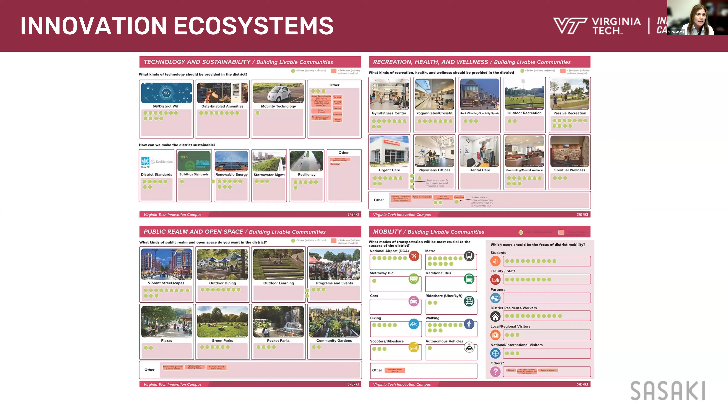So while we were evaluating sites, and we'd partnered with Alexandria's Economic Development Partnership as well as the city, an opportunity came up. The North Potomac Yard developers saw Virginia Tech as a catalyst for launching development of their phase one. Rob's going to cover that in a lot more detail in his section. But essentially, phase one of North Potomac Yard, if you're looking at the top left, from blocks 4 through 20, is approximately phase one.

North is to the left here. As you can see in the lower left, with the photograph there of the prior site in an aerial view, there was a theater on that phase one site in a sea of parking, essentially, with retention ponds at either end. And phase two of that development is where you see the current strip mall site.

But we saw this as the golden opportunity that we really needed. It aligned with all of our visioning, and the small area plan already featured a new metro station at the south edge. There was a linear park, a long-term mix of retail, residential, and office, and really great connectivity, including the metro, but otherwise as well. It really supported long-term growth potential there too, with phase two opening up a whole other area of development. So it checked all the boxes for the seeds that we needed to grow a successful innovation campus within a successful innovation district.

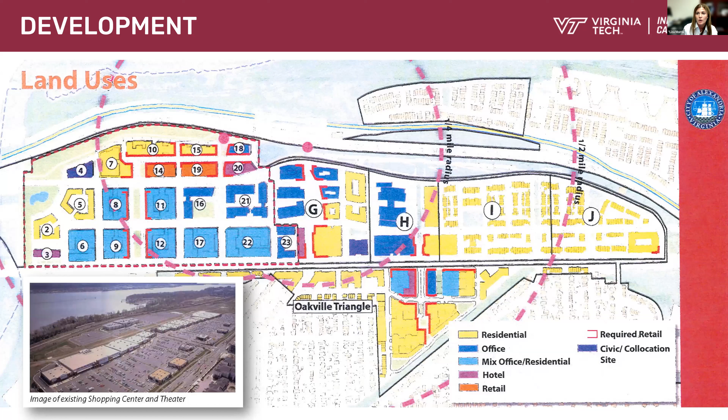For example, the pandemic happened right in the middle of this. And then the small area plan presented some challenges to us as well, where we ideally wanted to locate our campus at the north end of that phase one. In the small area plan, there was an above-grade parking garage there, and it was the only one currently allowed in all of the North Potomac Yard small area plan. So that had value from a development perspective.

But this would have been a wall between us and the rest of the district. North of that site, block 4, was designated essentially a K-12 school site. And while that relationship was really important to us as an innovation continuum, we knew that we needed to aggregate that site in order to create the complete campus my leadership was looking for from an end-state perspective. So there was some challenge there.

Another challenge was the zoning envelope itself, which included FAA height restrictions, National Park Service setbacks, and some related height limits, as well as the rest of the zoning envelope. But as it turns out—and this is a lemons-to-lemonade story—this challenging zoning envelope actually partly drove the innovative process and design outcomes for the building envelope developed by Smith Group. We're really excited with the results, and Sven will share more about that story with you a little bit later.

So we developed multiple urban framework scenarios within what we had to work with there. This directly informed our negotiations and back-and-forth with the development partners. Virginia Tech, we were really looking to the future—we had a long-term vision of wanting to create a campus there that would be there for hundreds of years, is the way that we were looking at it.

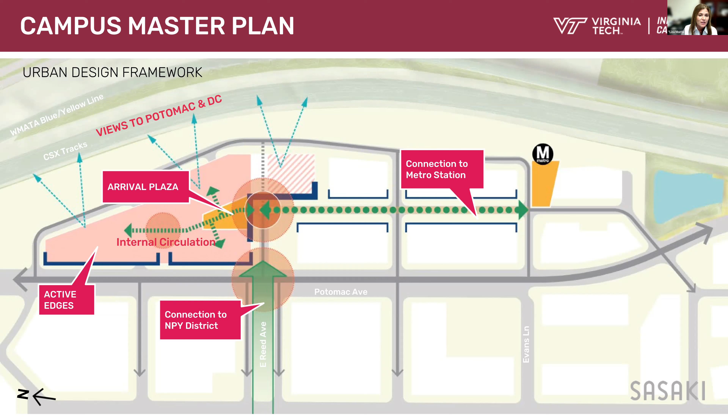So we developed win-win strategies and synergies throughout the negotiation process with some solutions that we felt were significant improvements for us and created win-wins overall.

We slightly modified the plan at Reed Avenue from a dog leg through the site to a pivot, which gave us a little bit more site development potential.

And working through the whole process of what it would take to move the approved above grade parking to below grade parking - that put some stressors on the institution in other ways, but it was really important to the site, and we were able to work that out.

That allowed us to open up the site and be able to receive into the campus rather than having the parking garage there and a wall at that really important edge.

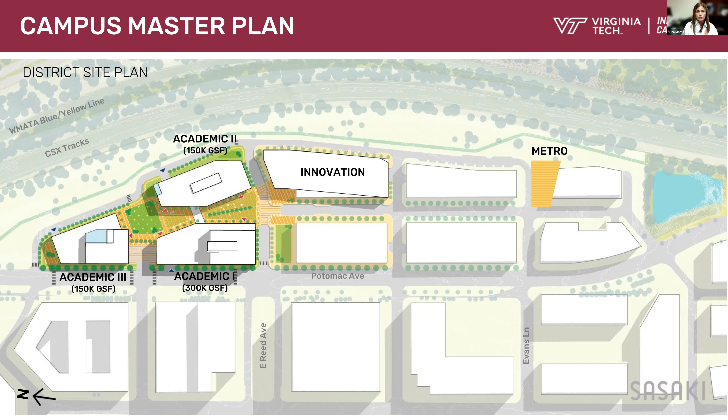The K-12 site on the north end, while it's important from a relationship and that innovation continuum perspective, was moved into phase 2 of the development. And that allowed us to drop that through street and really aggregate those blocks together to create a feasible campus site.

So here we're zooming in, and we carved out open space from that overall development potential envelope, dividing that into 3 separate buildings.

And here you can see we have academic building 1, which is the building that's currently under construction, and that'll be their biggest building on the site. And by doing it this way, it also allowed us to phase in academic 2 and 3 over time.

As our campus grows, another key move here to support innovation and the district overall was creating within that urban framework the raised plaza there, that raised pedestrian crossing from campus to the rest of the development.

And then specifically tying to development potential, we were able to work with the developers on off-campus within a building, to be able to lease some space there to support partnerships and innovation space that would further foster partnerships and spin-offs from the institution and within our academic building 1 space.

And so we were looking to that type of space to also create incubators and accelerators.

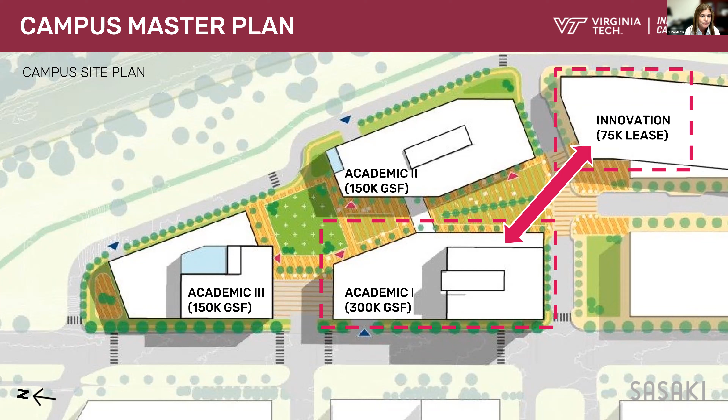So the shapes of the zoning envelopes were very intentional and specific. In part, we wanted to create surprise and delight as you moved through our campus, but there were also some key things that we did that tied back to the dramatic landscape experience you have here and at our Blacksburg main campus.

And so we wanted to highlight this fantastic urban context, but also tie back to Virginia Tech and our brand. For example, the campus is organized around a green space, very similar to the way the main campus is organized around the drill field, our large signature open space.

But within this tight urban context, everything is doing double or triple duty. So for example, the green space here also hosts a 30,000 gallon cistern underground, which is just one of our many sustainability components of the campus and site.

We also really worked hard to adjust grading across this site to ensure that it was fully accessible. So we wanted a site without any stairs and slopes less than 5%, without any ramps either, because we really wanted to ensure this was a welcoming place for all.

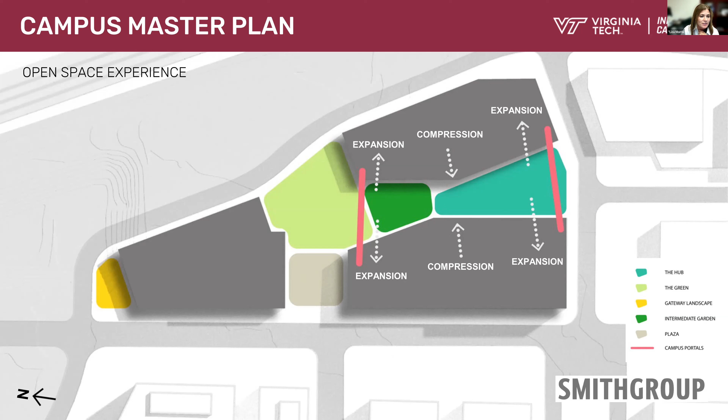One element that was really important to us was to ensure opportunities to have science on display. And so during this process, it worked really well with also the city's goals to activate the street level within the district, while giving us the opportunity to leverage that science on display as our brand of retail, if you will. And then you'll see that play out as you see more on the design that Sven will share with you.

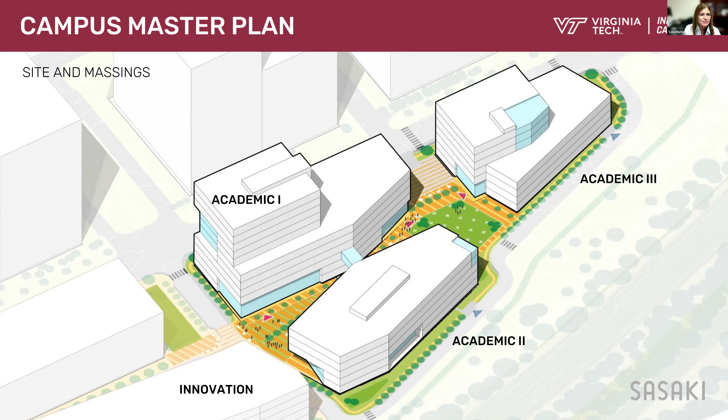And to the building program next. I just wanted to touch on this briefly as we move away from master planning. I just have one slide on it here about programming in general. So I generally don't like the term future proof. I prefer future flexible, and I like to think of all of our buildings as flexible containers, ideally.

Smith Group incorporated a bay spacing within this building that gives us a flexible approach to adapt as technology, as we know, will change dramatically over time and over the life of this building.

We also did another really important thing here that we called democratizing the perimeter, which was a big deal for Virginia Tech because it signaled a significant change for us within this facility in particular. It wasn't easy actually to come to this agreement internally, but it was really important to our development, and it aligned with our design principles.

We were able to largely move offices off that perimeter to the interior and then keep that perimeter open to views and shared daylighting. We think this really improves, from a well-being perspective, the quality of that space. So we're very excited about that.

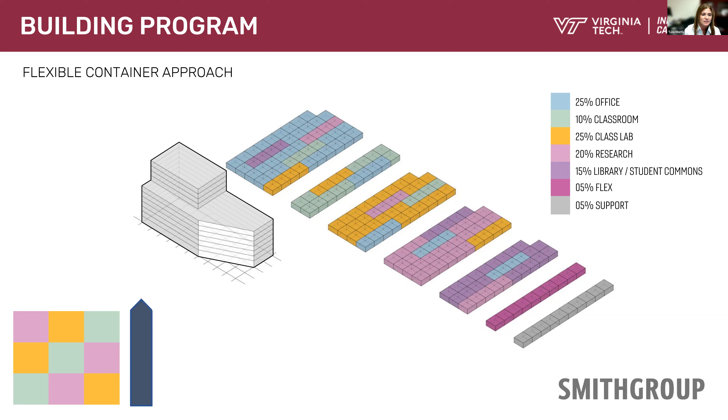In August of 2020, the university hired Lance Collins as our inaugural vice president and executive director of the Innovation Campus. Lance joined us from Cornell, where he served as dean of engineering and was also a significant part of the Cornell Tech initiative, so he brought that experience with him.

One of Lance's big goals was to create the most diverse graduate tech program in the country - meaning diversity of thought, background, and ideas. All of these things are really important to help unlock the potential of technology, and together with our design principles, we feel we're really well positioned to support his important goal with the physical realm we're creating.

Virginia Tech is also partnering with Alexandria City Public Schools to enhance science, technology, engineering, and math opportunities for students within the public schools, and to create potential pathways directly straight up through to higher ed.

We have some new partnership programs in place that allow undergraduate students at five other state institutions to apply early and earn graduate credits in master's degree programs based out of our Innovation Campus. We're really excited about bringing that pipeline to fruition.

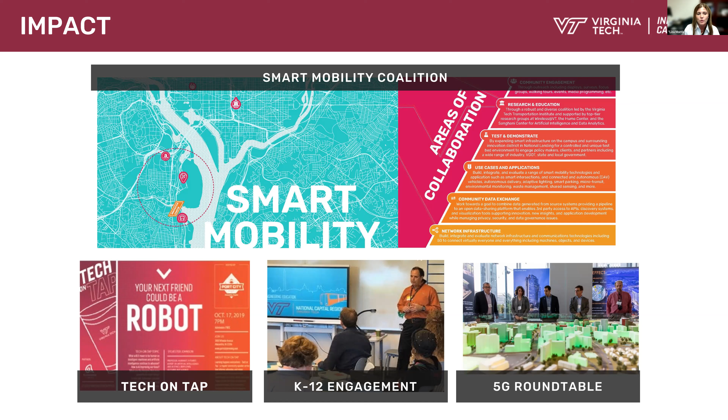The ecosystem is starting to develop around us. We're starting to bring our leading edge academics and researchers into the region. Some of them were already there, but this gives them more of a platform and a matrix to work from. This talent and proximity, we think, is really crucial to making initiatives like smart cities initiatives really thrive and happen.

One case study of that is the Smart Mobility Coalition, which Virginia Tech is leading, bringing folks together. We bring the expertise in how to build coalitions together with the technical expertise, and then can roll that out and get buy-in and partnerships to really bring something like that to fruition.

We've also done a lot of work in 5G and next-gen wireless already. We held a roundtable in National Landing, and that has generated a bunch of spinoffs and coalitions and other advancements that we'll be doing directly in and around the campus itself. We envision that partnerships only continue to grow in and around the district as it becomes a reality and becomes a true test bed for new technologies in the urban landscape.

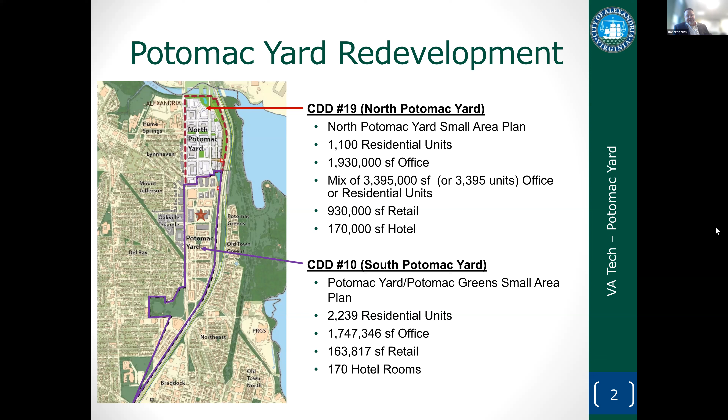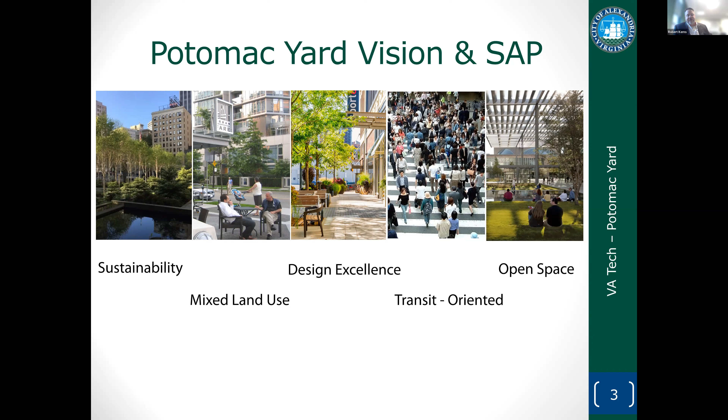That vision and the small area plan also matched well in terms of the principles Lisa mentioned. We were looking to push the envelope on sustainability and carbon neutrality in this neighborhood. We were looking for a mix of land uses already, and the campus only adds to that. We wanted to foster design excellence, to create a neighborhood and buildings that will stand the test of time and add to Alexandria's overall fabric. We wanted transportation choice and a mix of modes here, which add to the connectedness of this neighborhood. And the green infrastructure, the open space of the neighborhood—we wanted to build parks, plazas, various green infrastructure that ecologically and for play enhance the quality of life of the new residents and investors in this neighborhood.

We had these broad visions and aspirations, but we also had to take those aspirations and codify them for planning purposes to create land use approvals. Virginia Tech came to us, they wanted to implement and move forward. We needed to create the next step beyond the vision with zoning.

As Lisa mentioned, this part of Potomac Yard, or North Potomac Yard, was broken down into two phases. Phase 1 is essentially the innovation district and the campus—you can see the Regal Cinemas that was there labeled in the slide. Phase 2, or what people often call the Target Shopping Center, is for future phases of development going forward. We've planned all of that zoning and development so that as investors come in, they know what's going to happen and how the full build out of this neighborhood of North Potomac Yard will occur. It's 69 acres overall, and phase 1 is only 19 of those acres, just to give you a sense of scale.

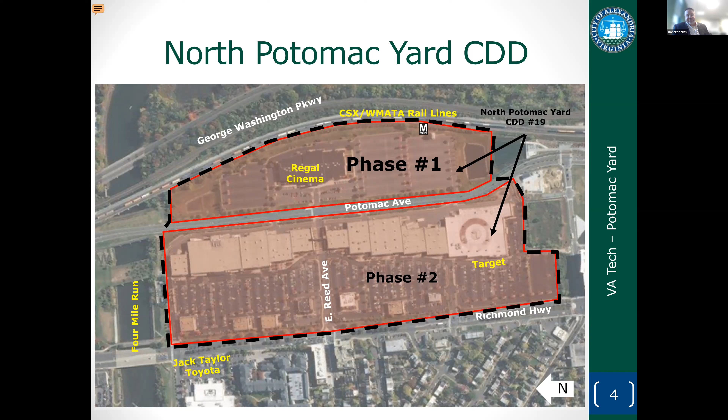In addition to the zoning, we also wanted to foster with Virginia Tech this idea of innovation. So we layered over the CDD zone something called the Innovation District. What the Innovation District does is cluster leading edge institutions in this overall neighborhood. We currently have the Institute for Defense Analysis open today, as well as the National Industries for the Blind, and others are coming. We planned a metro station to induce this neighborhood, and that metro station is due to open shortly—you can see it being constructed out there today. We wanted a dynamic mix of incubators and accelerators, along with other mixed uses to create activation and an exchange of ideas. That comes along with the urban fabric of a dynamic streetscape and parks, things that create the mixing of people and ideas, both in the buildings and at the ground level as you're moving to and from various places. All of these elements work together to create this bubbling district of innovation.

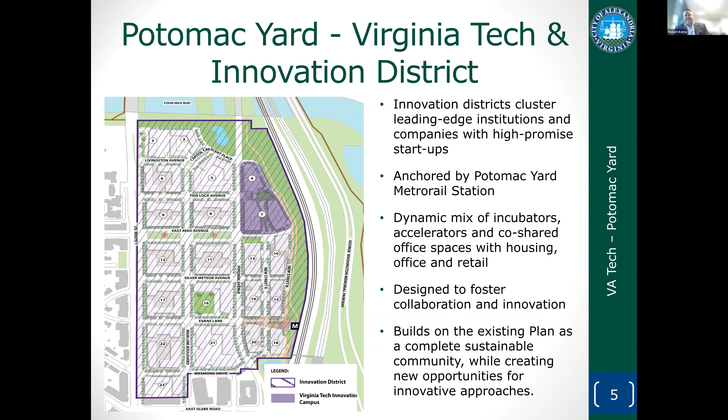Shifting back to the CDD concept plan, we wanted to make sure that block by block, we master planned for placemaking and for mixing of uses and institutions here in this district. The CDD concept plan becomes the roadmap that the municipality and applicants can use as they're looking to invest in this broader neighborhood, including Virginia Tech. It lays out the land use, building heights, locations for affordable housing, the metro station, various densities, and the frameworks for the streets and pedestrian connections. As Lisa said, these frameworks become the start for the design that shapes the buildings and the urban fabric overall.

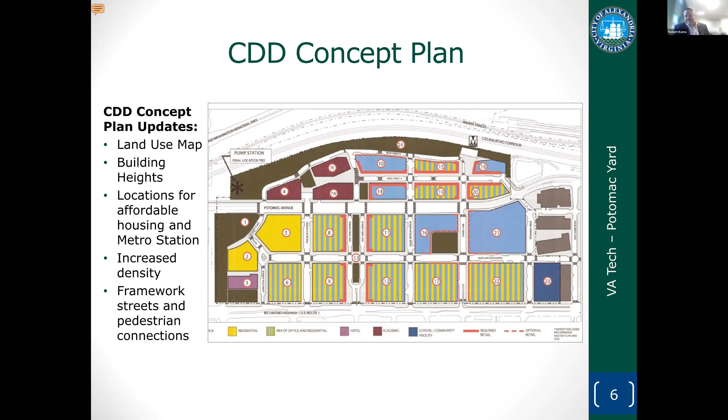This project was a tremendous opportunity, but also a very accelerated process, as Lisa can attest to. We essentially went from concepts to building approvals in just over 1 year. In March of 2020, as we were also in the mix of the pandemic, we were doing master plan amendments and design excellence standards to set the broad vision in place. In June of that same year, we were already doing zoning text amendments, the CDD concept plan, and the preliminary infrastructure plan, which was the ground plane for beginning construction. Then in the fall of 2020 and into the winter, we looked at the master plan for sustainability, a key guiding document, as well as all the development special use permits. There were 7 of them in total in this first wave of phase 1.

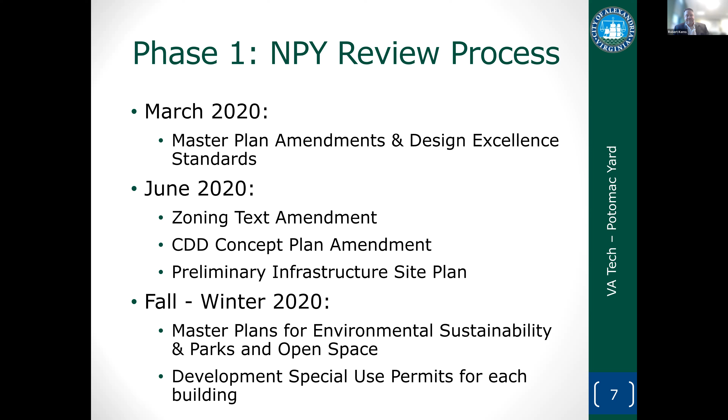This gives a bird's eye view of phase 1 and the innovation district, so you can see all of the various buildings that have been approved in phase 1.

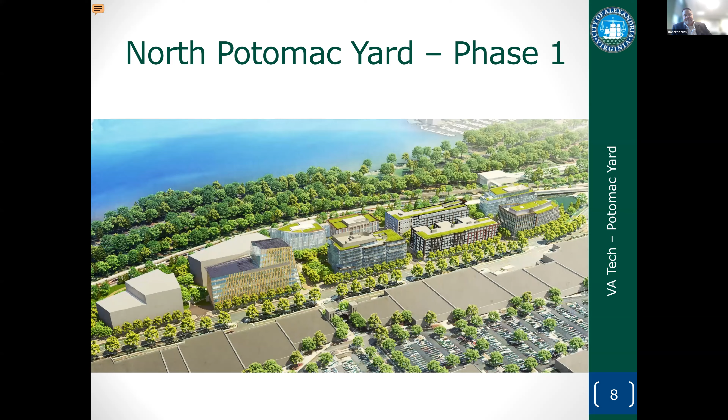In addition to the campus and all of its benefits, there were additional things the city was seeking in order to mitigate impacts of the development in this overall district, which also benefit the campus. We have the standard development benefits with site plans of public art, bike share, transportation management plan monies, and affordable housing. The affordable housing package alone was overall worth over $15 million when you put it all together, which was an important consideration for this neighborhood. Community facilities include monies for a new theater, $15 million for a new school, as Lisa mentioned, and dedication of a specific block for school and affordable housing in this overall neighborhood. For open space, we have multiple parks designed, which I'll get to in a few moments, but also offsite open space monies towards outside neighborhood facilities for the broader city.

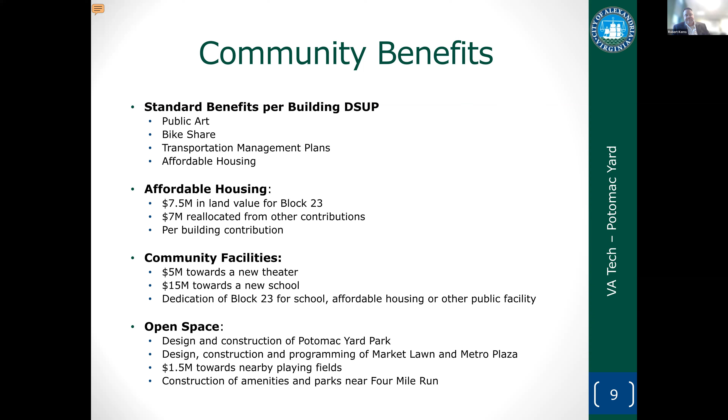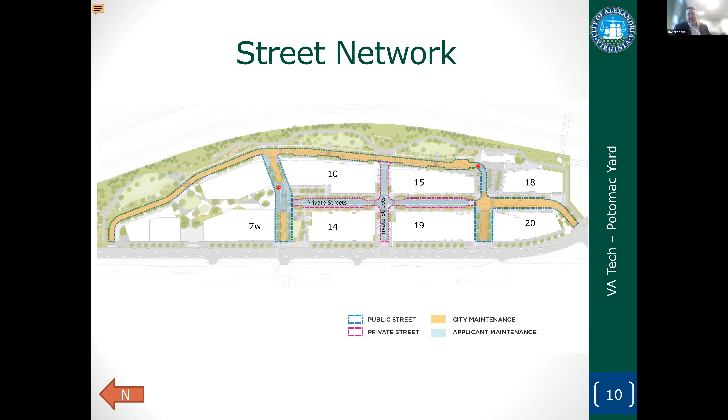I want to touch on several aspects of this overall district that help shape the urban form and site-wide elements, allowing for smart city planning and overall innovation. First is the street network. We had a grid which creates smart mobility options and transportation choice. We also had to address public versus private streets, so we could put in the public infrastructure needed and have enough connectivity. But we also very deliberately created some private streets that allow Virginia Tech and other building owners to activate those streets, even do some smart city planning and urban mobility experimentation that they wouldn't normally be able to do on a typical street.

We also looked at the open space and public realm of this project, the green infrastructure, for ecology and for play in this overall district. On the ecology side, we were trying to manage stormwater while providing open space, as well as creating a well field for geothermal and a SWE component that will be talked about later. So doing energy and stormwater while also creating significant recreation options in this overall district. We have a community level park, plazas at the metro station where there's activation and even dining, and then there's Market Lawn adjacent to the campus. Again, these spaces around the campus will create the dynamism and places for people to meet and have fun.

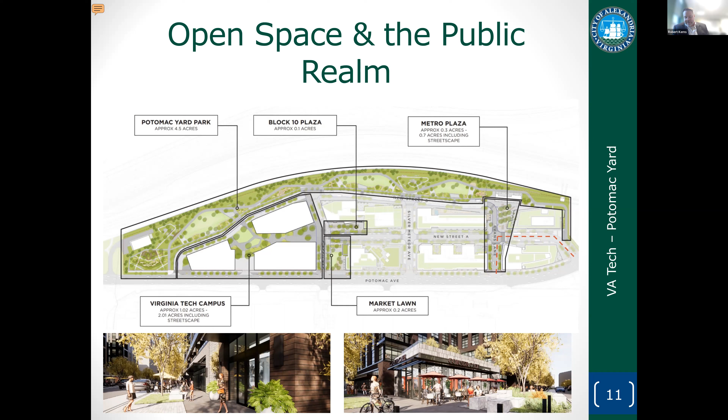So almost every project we spend a lot of time talking about parking. This overall effort was no exception, even though it's right on top of the new metro station. We tried to really minimize parking to the greatest degree possible while sharing those facilities all underground, so they would not take up valuable space on the ground plane above. We required the minimum amount of parking possible, but also had shared parking strategies and parking management systems underground so that this element would be properly right-sized for this project overall.

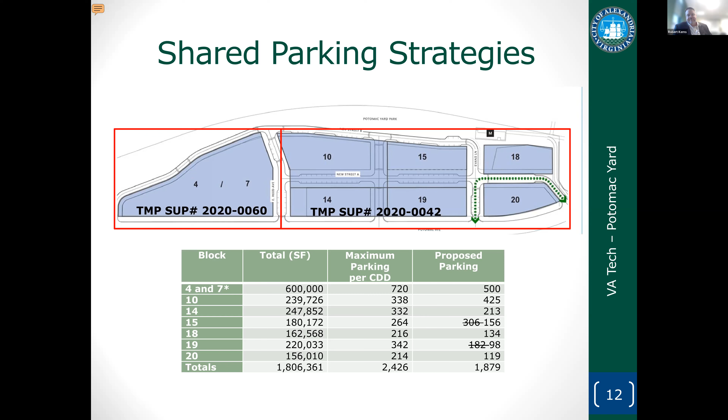This just provides a picture of that pump station and how it rests in the park system, and you can see how it's integrated into the overall landscape.

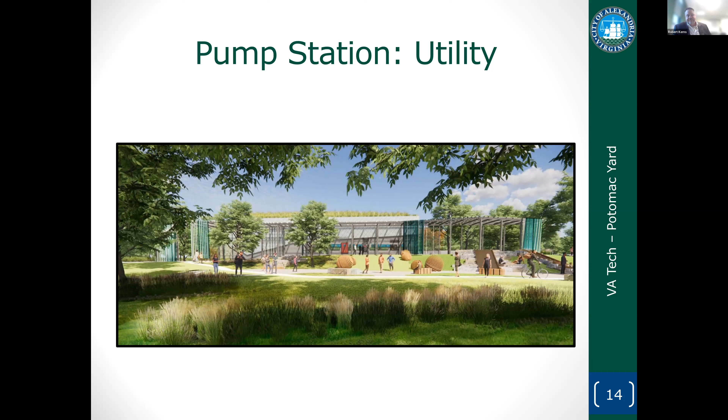So Lisa's already talked about the Virginia Tech campus. I'm not going to talk further about that, but what I'm going to do is just take you on a little tour down the main street of the district so you can see the other buildings in relation to the campus and how the dynamism of this district is coming together and the urban fabric is going to unfold.

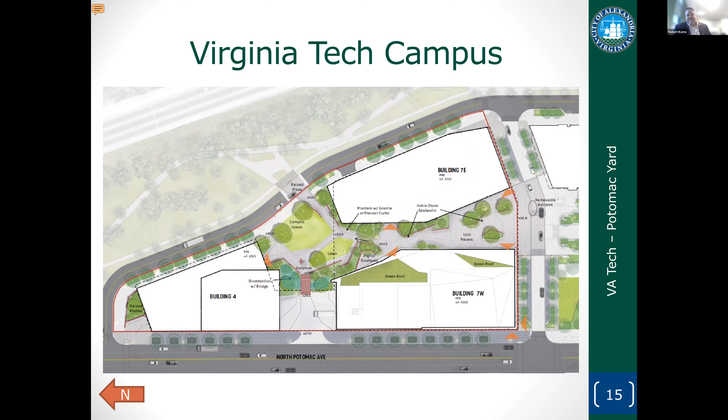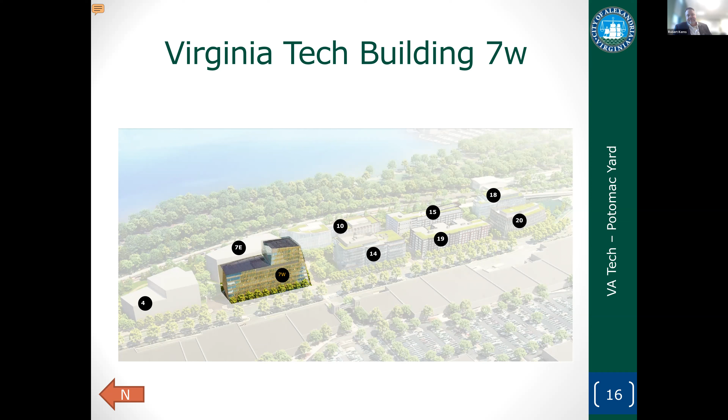So you can see the first building, Academic Building 1, here highlighted. This is the crown jewel building that will create the landmark for the campus on the northern end.

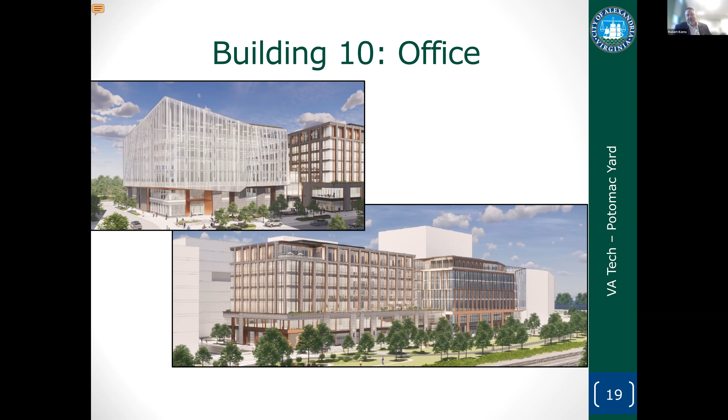Walking south, you can see the partnership building. This building will be a counterpoint to the Virginia Tech building, where it's going to have a glass veil of a different scale and housing innovation uses, as Lisa mentioned. It will also face onto the park to the east.

Across the street from the partnership building will be another office on block 14. This building features loggias in the architecture, and it's a high performance building celebrating lots of open spaces, but also open spaces on the rooftop, to again have dynamic things happening at the ground and on the roof levels.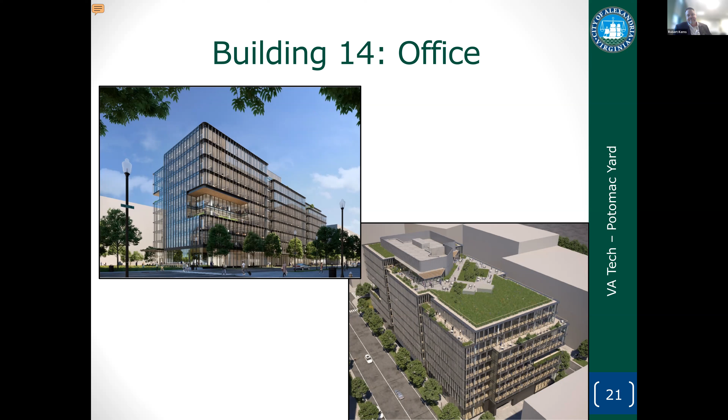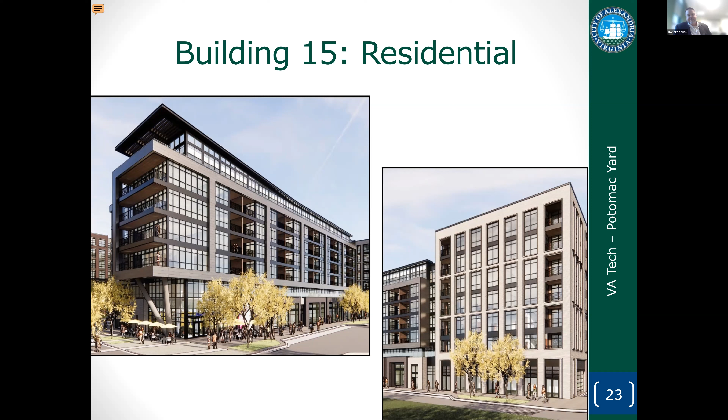The other residential building in the district is more of an industrial mercantile style building, again mixing up the architectural expression and style to vary the experience of people in the district.

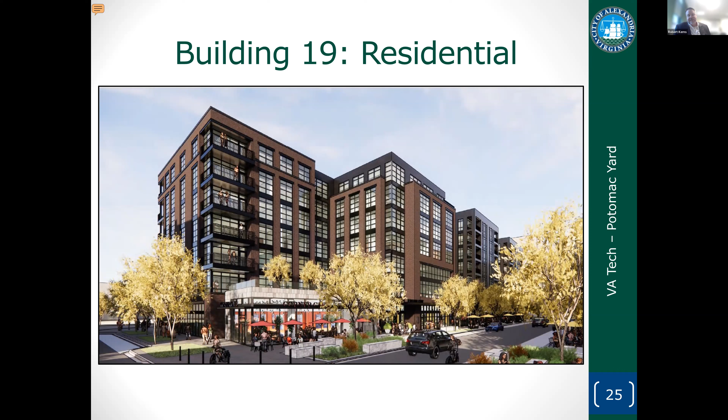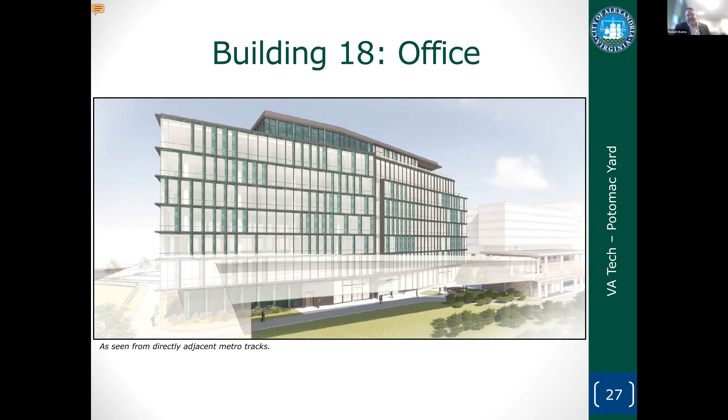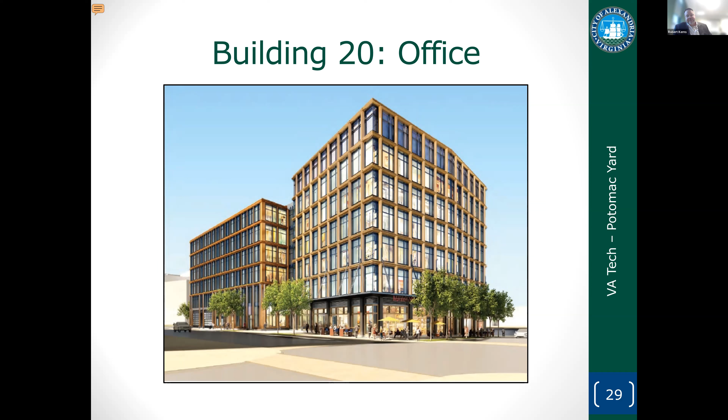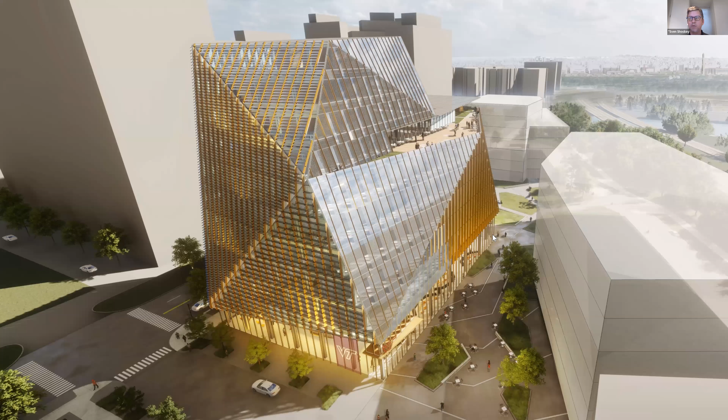Good evening. So you've just heard from Lisa and Rob. A lot of significant planning had been incorporated into the project prior to the building and site design. I'll walk you through the design and how it was subsequently developed. So this is a view of the project, seen from the southeast. Amazon is straight ahead, north, National Airport, and DC beyond to the right. The mixed-use Potomac Yard Innovation District is just behind in this view.

I'll start with some broad facts about the project. It's about 300,000 square feet, an academic building, primarily configured for graduate level computer science and computer engineering programs, featuring research and testing labs, offices, instructional spaces, collaboration, and support spaces. The campus is around 4 acres, and it'll eventually accommodate 3 buildings. The future 2 buildings are 150,000 square feet each, ghosted in to the right and beyond. The first building is 11 stories tall, with tall floor-to-floor heights because it's lab space, so it reaches about 180 feet.

The program, or project, is a new 21st century campus that will redefine Virginia Tech's presence in Northern Virginia. The first thing you notice about the project is the gem shape and highly articulated skin design. I'll walk you through the process that resulted in that. Of course, the work is a result of a very large team within SmithGroup, and of course all the consultants as well.

So the process originates with the guiding principles that Lisa noted. Virginia Tech provided the guiding principles to the design team at the outset of the project. They were essential for the large team to be able to establish priorities and to shape the trajectory of the project throughout the process. The design was to be centered on the principles of sustainability, health and wellness, green and social collaborative spaces, accessibility, connectivity, flexibility, and integrated technology.

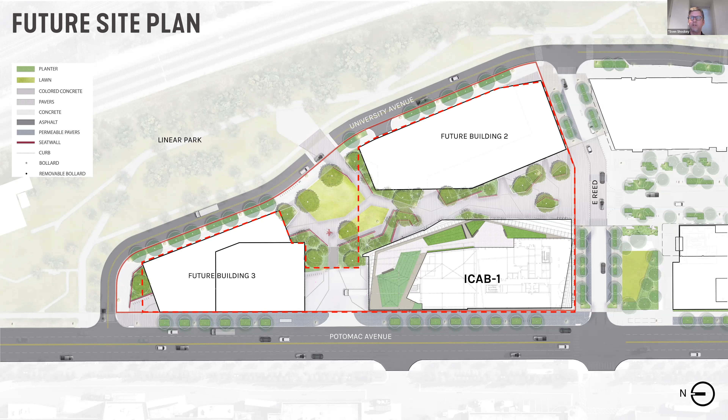And then as you move to the left, to the north, the space between the buildings is compressed and then expands to a lush campus green that features rain gardens as well as a campus lawn ideal for game day and other types of activities. The greenscape visually connects then to the large linear park across the street to the east. And then despite the grade differential between north and south, it's all continuously accessible without ramps or stairs.

Next slide, please. Before the second phase buildings are constructed, their footprints are accommodating right now surface parking, but that'll ultimately all go below grade.

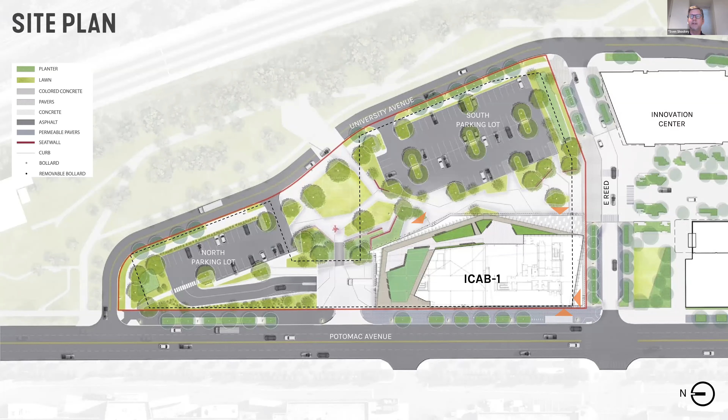Next slide. Among Virginia Tech's goals were to achieve a high level of sustainability and integrated technology, a pathway to net zero, and a prohibition of fossil fuels on site. While the building design and systems will minimize energy use and employ passive approaches, we also look for a pathway to generate electrical power on site. Photovoltaics are often employed on rooftops, but we wanted to study if they could be used on other surfaces effectively as well.

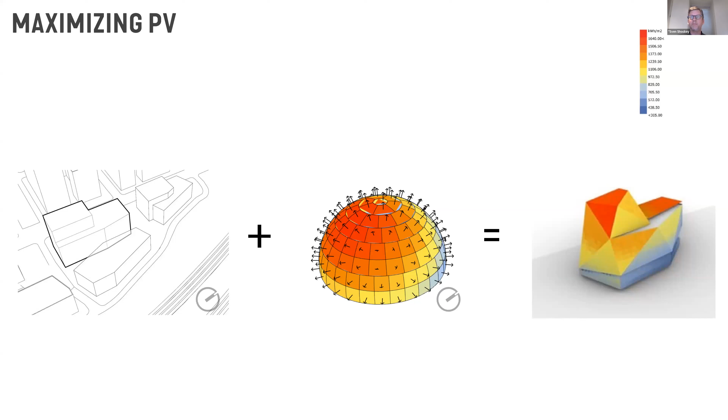Next slide. So in the spirit of the project's computational science and innovation program, our computational design team developed a generative parametric algorithm that's initialized with the zoning envelope, and then flexes the geometry, pushing and pulling the mass, testing facets, and then analyzes each resulting form in terms of potential PV output, impact on the program area, and impact on the zoning envelope. The process learns and categorizes results along the way, ending up iterating over 420 variations and then ranking them.

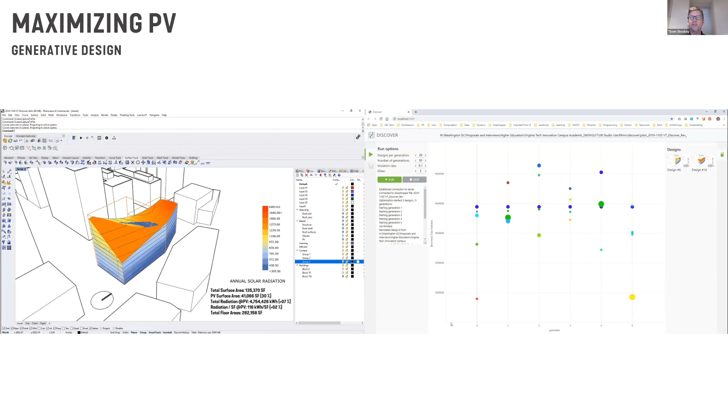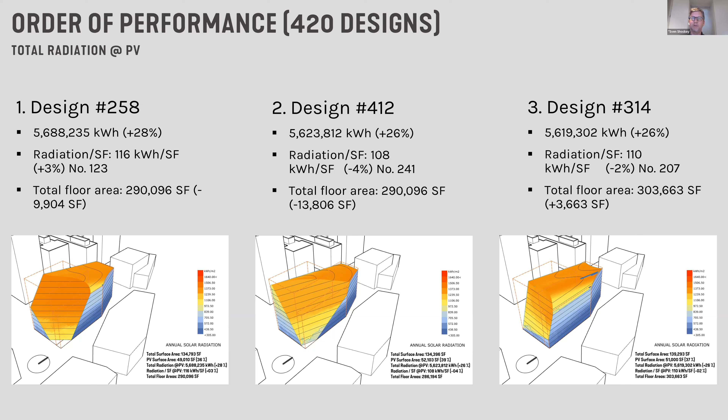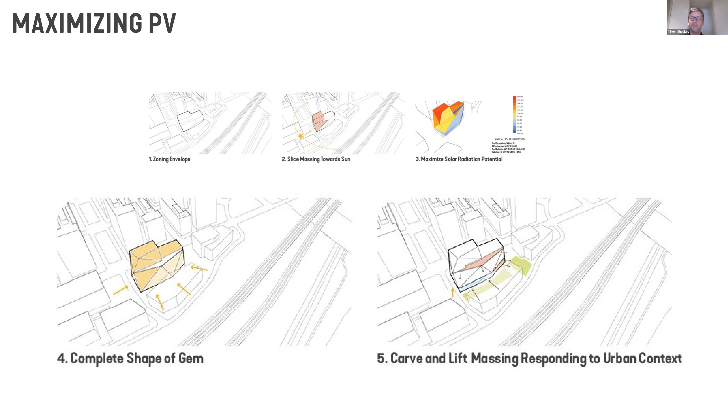Next slide. So additional sculpting of the form was needed to amplify human factors, adding terraces and pushing in the ground floor to accommodate a welcoming protected zone close to the building. And then since the site is so close to DCA's flight path, design of the rooftop, the fifth facade, was actually an important design consideration.

The ochre color is a reference to selected warm tones found in Hokie stone, a dolomite limestone pervasive on the main Virginia Tech campus in Blacksburg. The terracotta fin depths and angles actually vary slightly between each facet to provide passive solar shading and glare control.

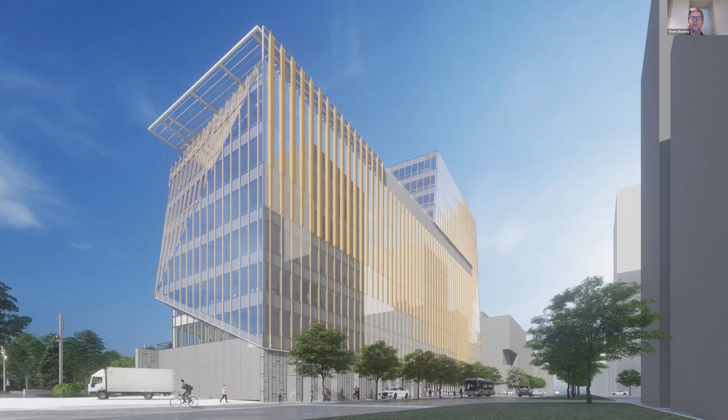This view from the northwest illustrates how the building becomes more porous as you move around to the north.

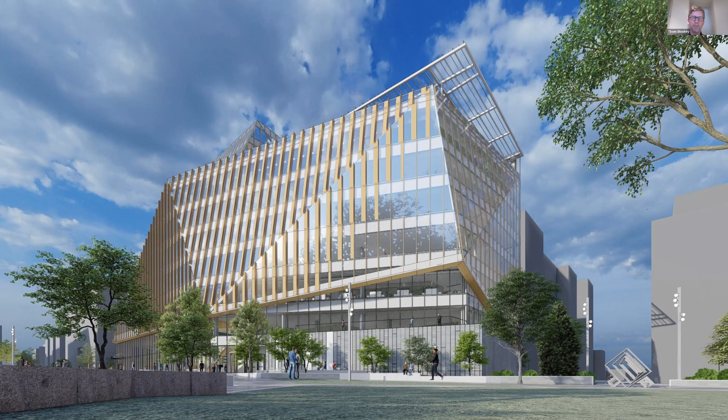The view from the northeast illustrates the building as a dynamic backdrop, opening up to the campus green in the foreground.

Once the skin materiality and technology were established, each facet was optimized for PV power, solar heat gain, daylighting, glare, views, and urban form. On a rectilinear building, the faces have very different orientations, but with the faceted gem shape, each face has different but sometimes subtle variations in character.

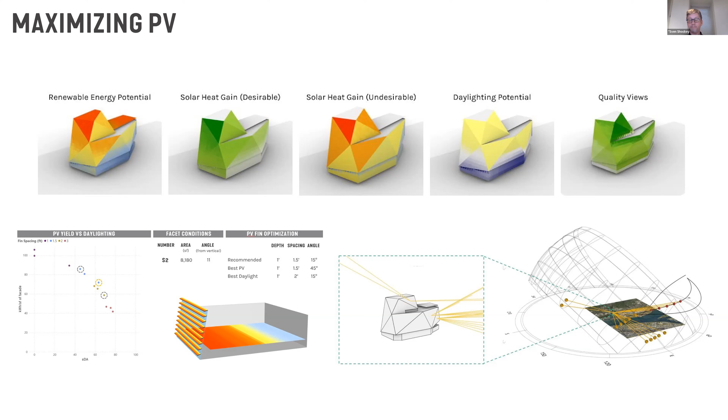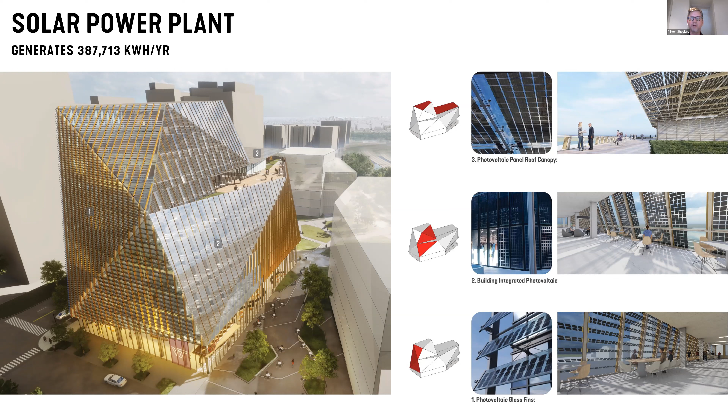This rendering expresses and shows the qualitative aspects of the BIPV areas, providing generous daylighting and clear areas for views, but with biophilic dappled light and shadow patterns throughout the space.

Both Virginia Tech and the City of Alexandria emphasized throughout the importance of activation and transparency of the ground floor, connecting the building to the surrounding campus and to the public realm. In the context of a compact campus and future urban environment, there's not really an ideal location for the back-of-house functions, so loading and other building support spaces had to be carefully considered.

The next few images speak to the design of the ground floor building perimeter. In the lobby, taking up most of the east facade, there's a high degree of transparency inviting connection between interior and exterior. The geometry of the building mass at this point enters the lobby and becomes tangible, tactile, and experiential.

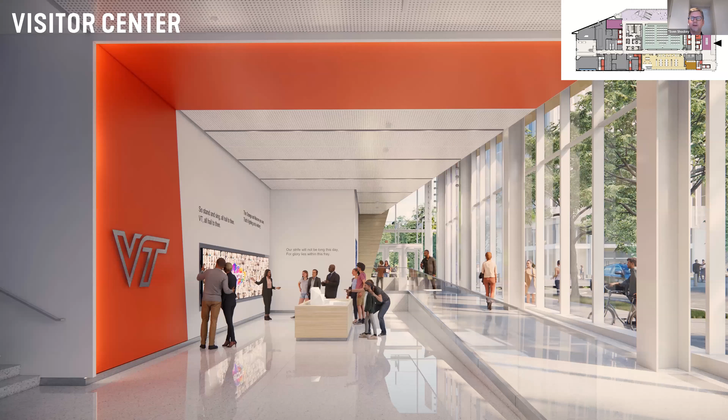The visitor center, on the south side, features the possibility for a tour starting point and information about the university, visible from the mixed-use development to the south.

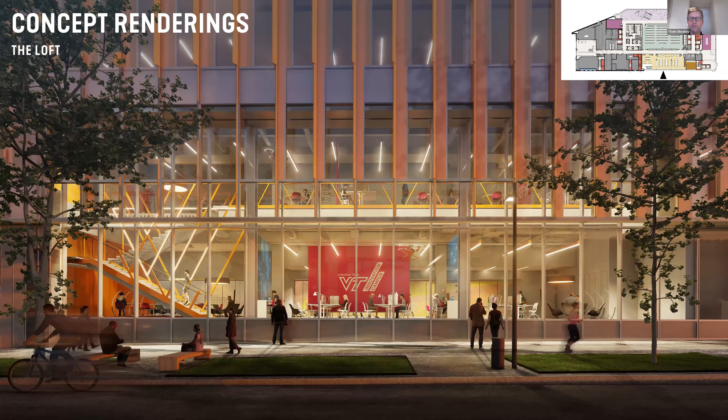Wrapping around to the west side, the building features views into the loft, a two-story space where students will work on capstone projects, with a full display of instrumentation, science research, and activity, probably well into the night.

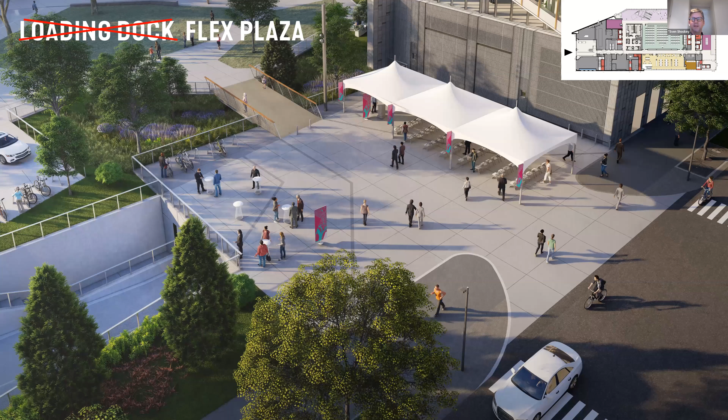What's typically designed as a loading pad has been reimagined as a flex plaza. The loading dock overhead doors are flush with the adjacent facade and feature a corrugated perforated metal for texture. A pedestrian bridge leads over a rain garden, becoming a threshold between this space and the main campus.

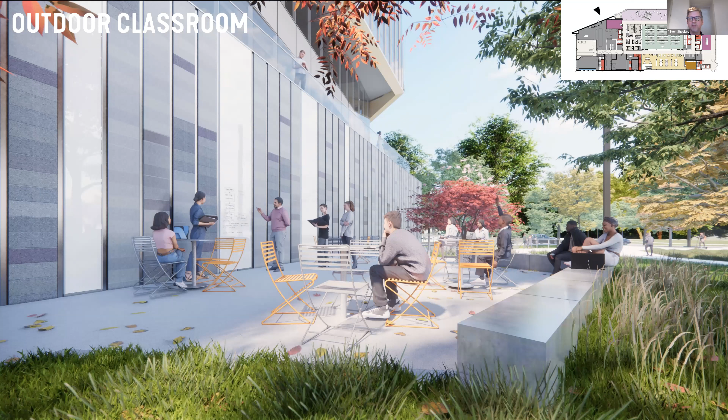Wrapping around back to the northeast, this portion of blank wall was concealing internal mechanical spaces. It's been activated by configuring it with white glass boards interspersed with saw-cut Hokie stone block walls, surrounded by green, giving it a very immersive quality.

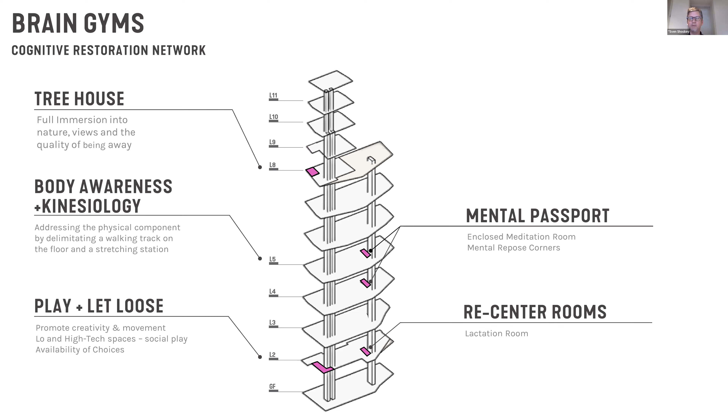As part of designing with a human-centered focus, the building program has been augmented with a network of spaces specifically addressing wellness. Everyone has access to the perimeter, but we introduced special spaces called brain gyms, which are essentially refuel stations to enhance the way we think and act, putting health and wellness at the center of the student experience. There are spaces for cognitive restoration to balance with the mental focus that students and faculty will maintain throughout the day.

This is one of the brain gyms, on the second floor on the south side. It has two areas: one for analog gaming, and the other, behind this view, where digital gaming can occur.

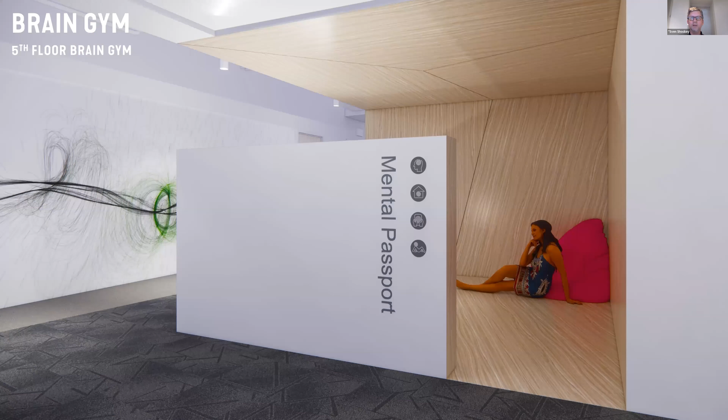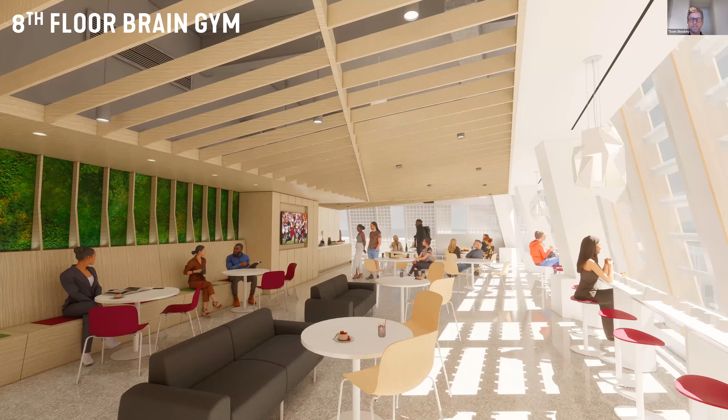We have a few spaces which are more about quiet, calm, solitude, surrounded by biophilic materials and acoustically absorptive surfaces. The treehouse is high up in the building and features dappled light, wood, and biophilic elements that encourage quiet contemplation.

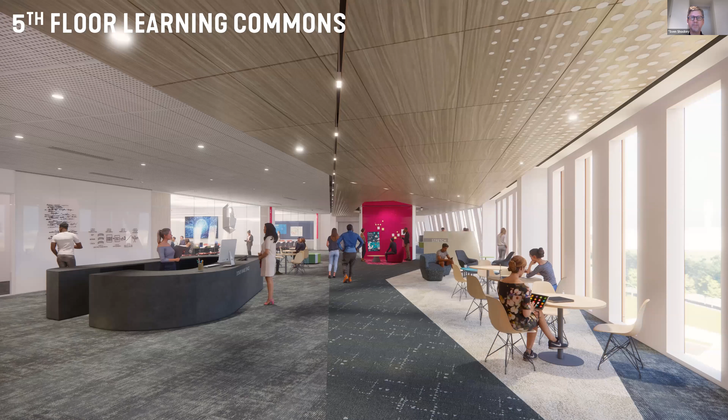The Learning Commons is a stop on a graphically indicated walking path that leads throughout the building, encouraging kinetic movement. There are stretching stations at various points along the way.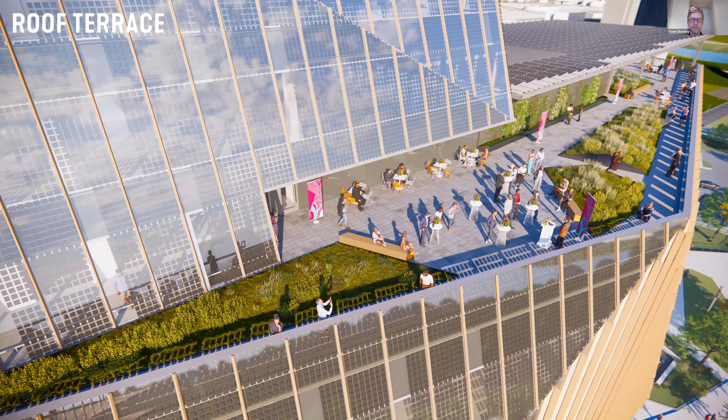Back to this connection to light and views, the campus itself, green spaces, and variety, the roof participates in that flexibility as well. It features planted zones with topography that can support different kinds of plantings, and of course dramatic views around Virginia and the airport district.

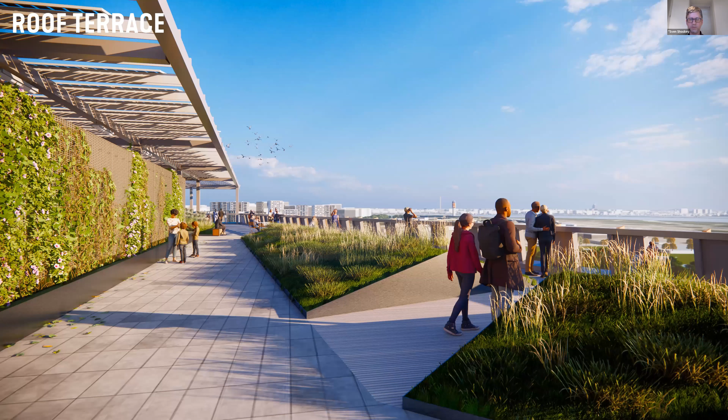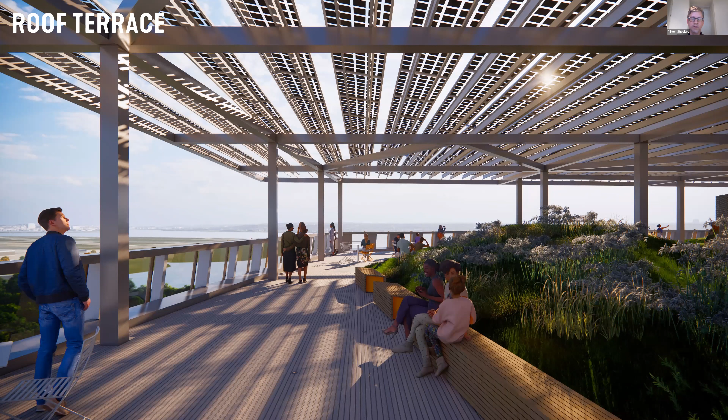Another view, but there are multiple zones on the terrace, so you could have multiple groups up here at the same time using the space. The photovoltaic trellis extends the times of year the space and terrace may be used, into the warmer months, because you've got protection from the sun.

So with that, I'll hand it over to Jameson to present high performance systems.

Thanks, Sven. In the interest of time, I'm going to dive right in and probably talk faster than I need to. As the engineer in the bunch, I'd probably be remiss not to start my presentation with a fuzzy, borderline illegible chart for everyone to take a look at, but I promise this one's pretty impactful.

We knew this project had very high aspirations for sustainability and resilient design, specifically some aggressive energy and carbon goals, and that meeting those project goals was going to force us to look beyond traditional system design. Early on, with some conceptual shoebox modeling, we understood that due to the size of this building and the variation in program space types and occupancy schedules, there's actually a large overlap in heating and cooling demands throughout this building, almost up to 30% of the annual operating hours. So we knew that designing a system tapping into heat recovery potential was going to need to be a pillar of the system design.

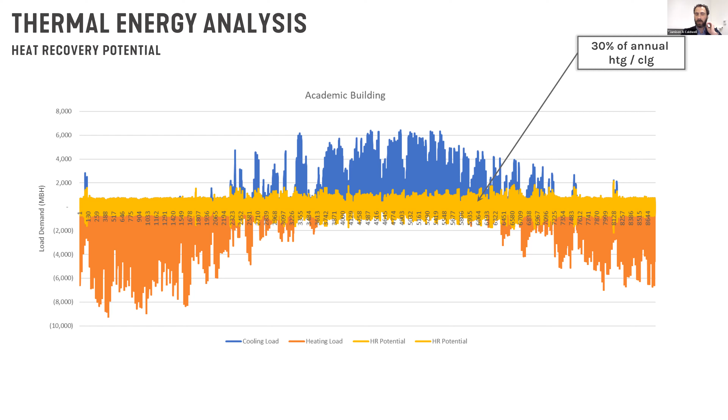Another opportunity that presented itself is the site itself. This is a unique project in that it's a building within a campus within a district. As Robert touched on earlier, the wastewater capacity of the overall district actually offered us an opportunity for energy exchange. Very early in the conceptual design, we worked closely with the city to help evaluate when the overall capacity of wastewater in the district was going to make sense to tap into. To the city's credit, putting planning into something that was going to come to fruition in a 10-year time frame, as you can see in that point of inflection between the orange and the green bars, is pretty incredible, making sure we have the space and system components in play to tap into in the future.

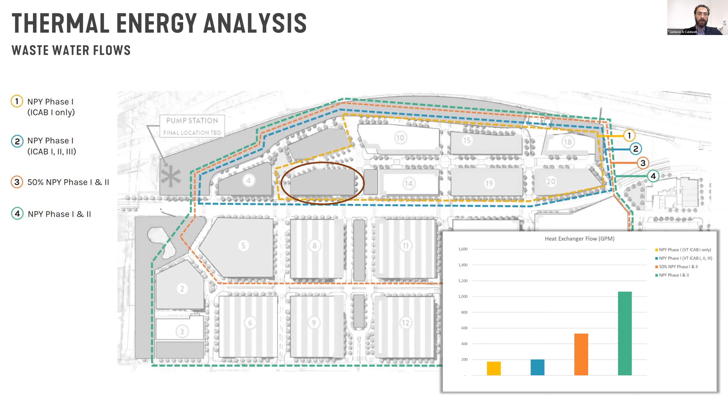That sets us up for the overall system approach we took on here for the ICAB 1 building. You can see out there with block 4, we've got some energy exchange capacity in that SWEE system—that stands for Sewage Wastewater Energy Exchange, for those wondering. The number 5 there with a lot of dots, that's the bore field, which represented another opportunity for a source sink energy exchange.

We also started to look into deep foundation energy piles, which puts bores into the deep piles that exist under each of these buildings. We assessed the capacity of each system and decided it might make more sense to dedicate one component to each building. So ICAB 1, the building we're talking about today, will take the SWEE capacity, leaving the concept of deep piles and the geothermal bore field for the future buildings.

We also looked at whether it made sense to centralize a central plant that would serve this full campus. Obviously that creates great efficiencies for this building and the two buildings in the future, but it ended up being something that first cost and program space alone wouldn't really allow.

So the concept we have at ICAB 1 is something that can be replicated at each of the buildings to follow. It centers on this multi-source energy exchange system, meeting a project guiding principle of being fully electrified and using no fossil fuel for thermal energy generation. That's a tall demand, and we needed to tap into this multi-source energy exchange to accommodate it.

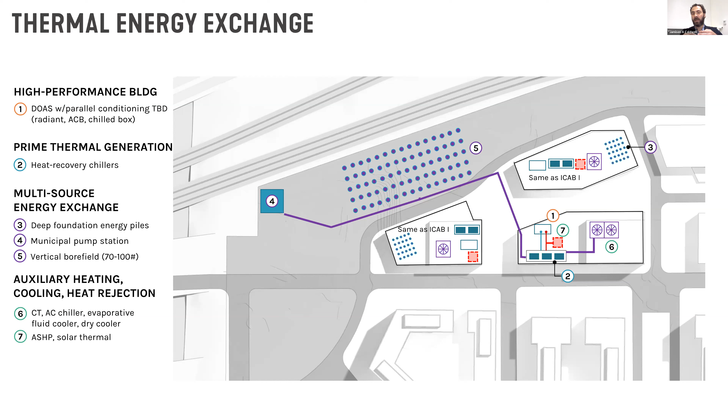So what we really have is a site using predominantly energy recovery between systems, trimmed with air source heat pumps and air-cooled chillers.

We did a lot of energy modeling for a project like this, and in my experience, the actual physical representation of this model is probably more advanced than most any other energy model we've produced recently. Specifically, we looked at things like the fin structure that Sven was talking about, and the way a building-integrated PV, or a PV fin, affects the overall performance of the glazing unit below it. All of those were things we wanted to take into account in this study.

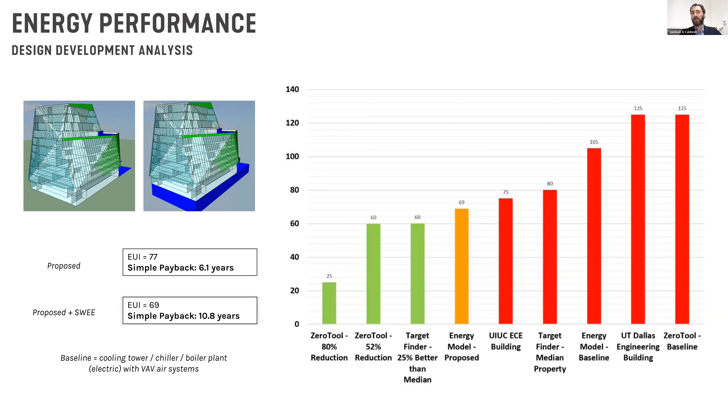We're estimating that this project, on day one, probably falls somewhere in the 75 to 85 range on an EUI scale. Then in the future, as that SWEE system becomes available from a capacity standpoint, and as VT operations really hit their stride owning and operating this building, that EUI should probably drop to somewhere around 65 to 70.

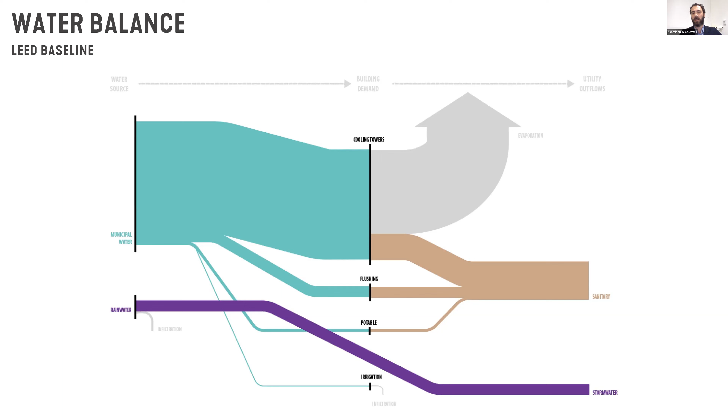If we move to a highly efficient central plant - not the concept we've got in play, but one that taps into that energy, the heat recovery between heating and cooling only - you can greatly reduce the amount of water used by that cooling tower system. The other thing you're seeing here is that we're beginning to capture some of the rainwater in this concept and use that to offset cooling tower use as well.

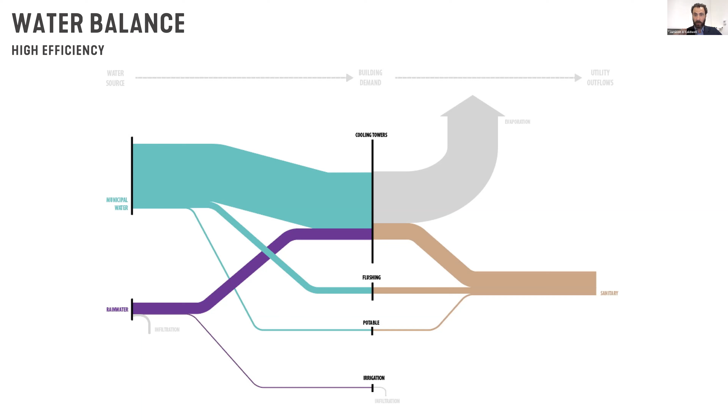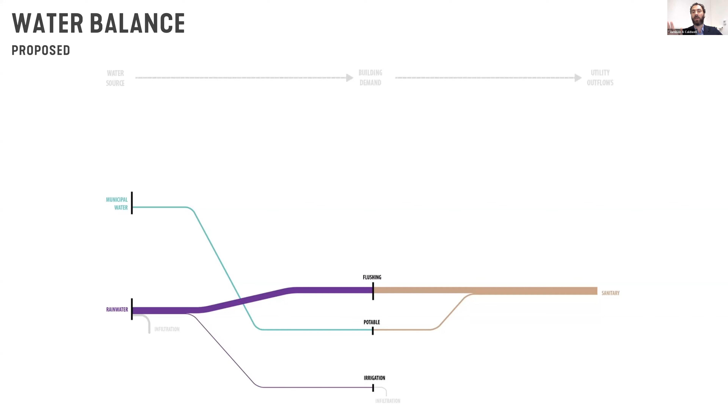The final concept here is actually where we end up: getting rid of those cooling towers altogether. We have a 50,000 gallon rainwater collection cistern on site, and between the electrified central plant concept and the collection of rainwater to backfill our flushing demand, we're basically limiting potable water use on site to drinking water sources and sinks.

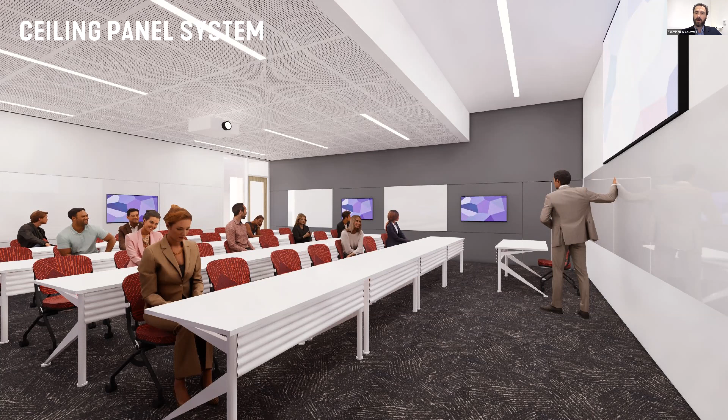Carrying that overall concept of wellness and interior quality of space, I wanted to demonstrate that the radiant ceiling panel system, which serves the primary heating and cooling of all our interior spaces, was heavily integrated into a ceiling system where you really can't differentiate a heating and cooling panel from the otherwise standard metal ceiling panels. The perforation of these panels, whether heating and cooling or standard, again provides a high level of acoustical treatment, and it's all highly integrated between lighting, AV and IT, and any other ceiling component, to give a very polished look that almost lets you forget those systems exist at all.